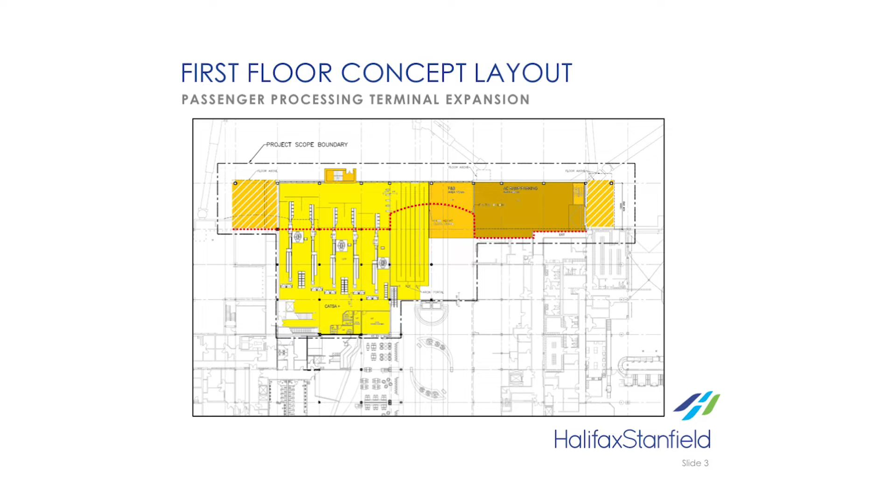So here's the concept we started off with, before we ever started the project. This yellow and gold area is the ground floor of the terminal, and the red line is the existing apron terminal interface. This is the first floor, so we want to build out onto the apron.

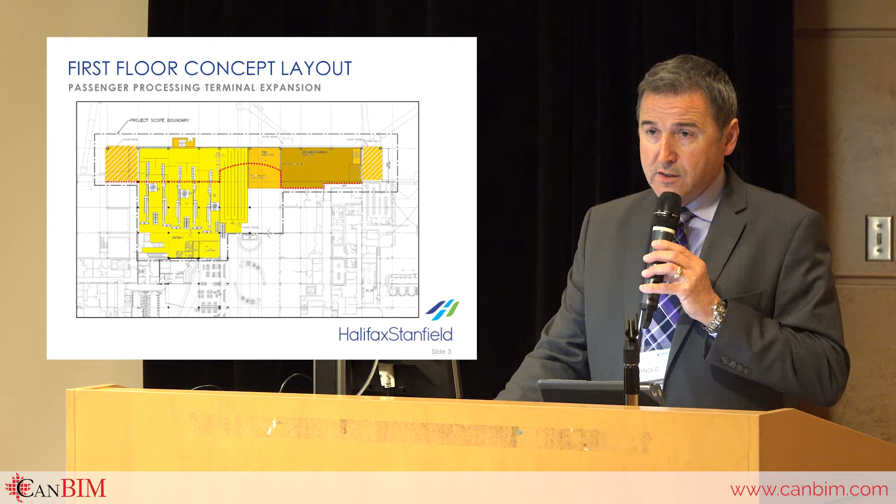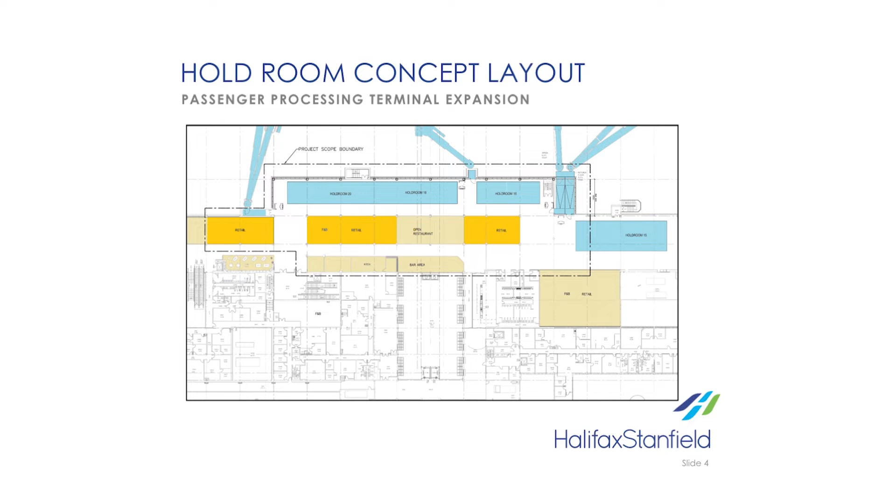On the second floor, we consolidate the concessions so we can move the high-volume, high-frequency passengers to the middle, letting them spend money and increase our non-aeronautical revenue, so we can have the airlines here cheaper and fund the operating budget from the passengers using the facility. It's a win-win for passenger volumes and for the customer experience.

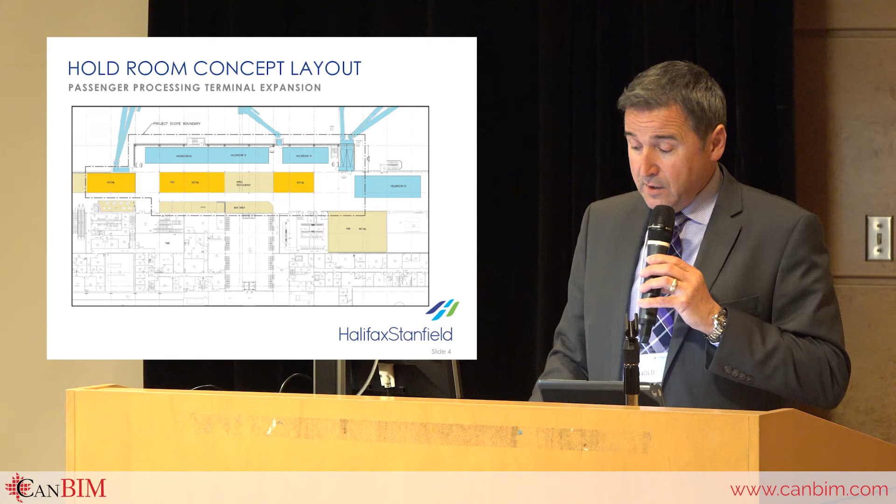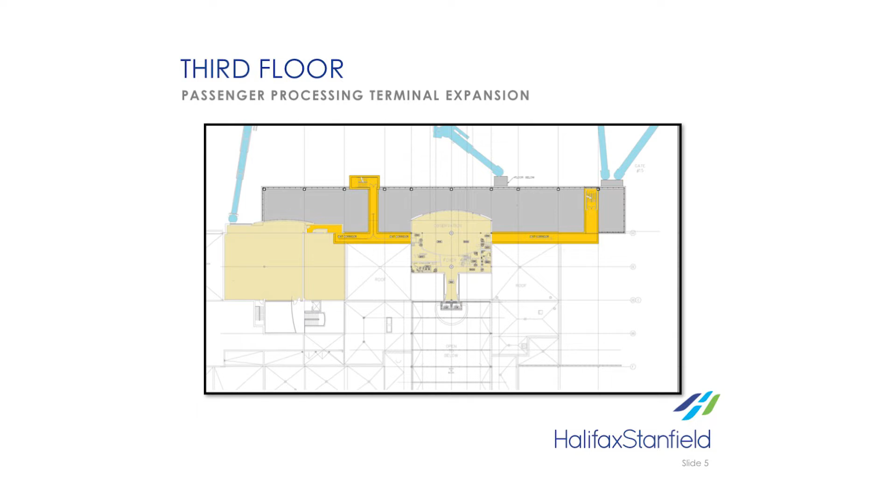Because we had an option to do a 2-story or a 3-story through the modeling process that WSP did for us during the project, and the budgeting that they did before we ever tendered, we were getting close to, well, what can we build here? So we found out that we wanted to do the 3rd floor, and we found the money to do it.

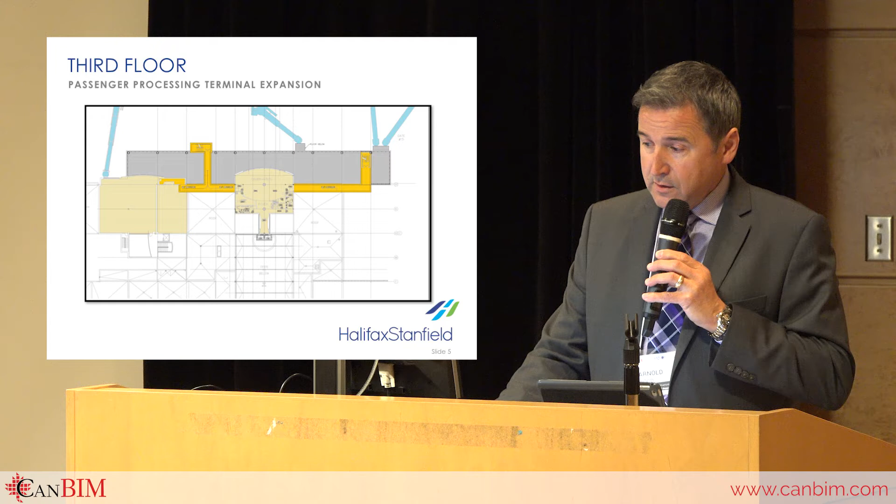So we're starting the builds. We've got aprons closed, gates closed during phasing, and we're on schedule and we're on budget. And that's vastly because of the advanced Revit modeling that we did in advance, and then follow that construction process.

We're still finding small issues, and I'll get to that in a second on lessons learned. But the schedule, you're never on schedule at the airport.

Because of operations, we had to be on schedule because we need all our gates in the summertime, and we took 2 gates out at a time before Christmas, got our gates back operational at Christmas. Then we took 2 until Sunflight season. Sunflight season just finished, and so we got our gates again 2 weeks ago, and we have to have the steel up for July 2nd weekend.

We lost 3 days, but we had a week of float, and we've got a plan to get it back. So having all that done in advance really helped.

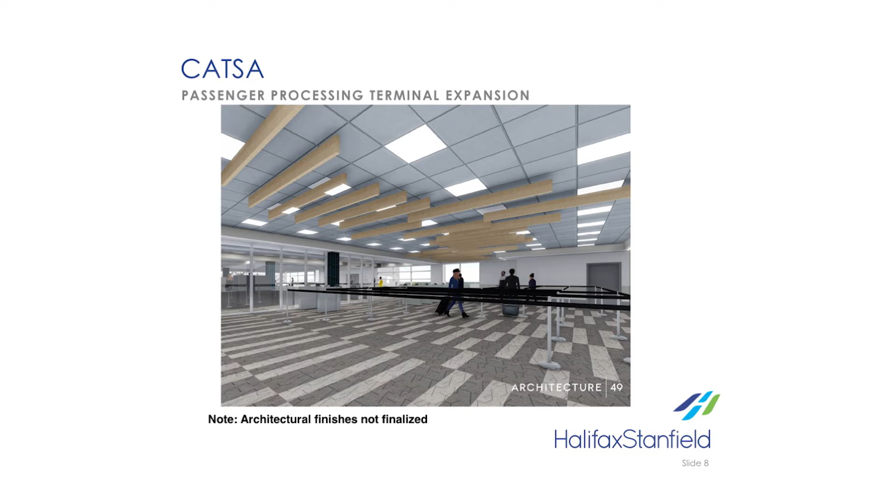So I'll go through some more of, I don't have a lot of detailed Revit drawings here, I've just got some of the 3D drawings showing the views afterwards. This is our PreBoard Screening expanded. This is our new 40% deeper check-in hall for the longer CATSA Plus screening lanes. If you guys experienced in Toronto, Montreal's got theirs, Calgary, and Vancouver. So this is designed for that same equipment.

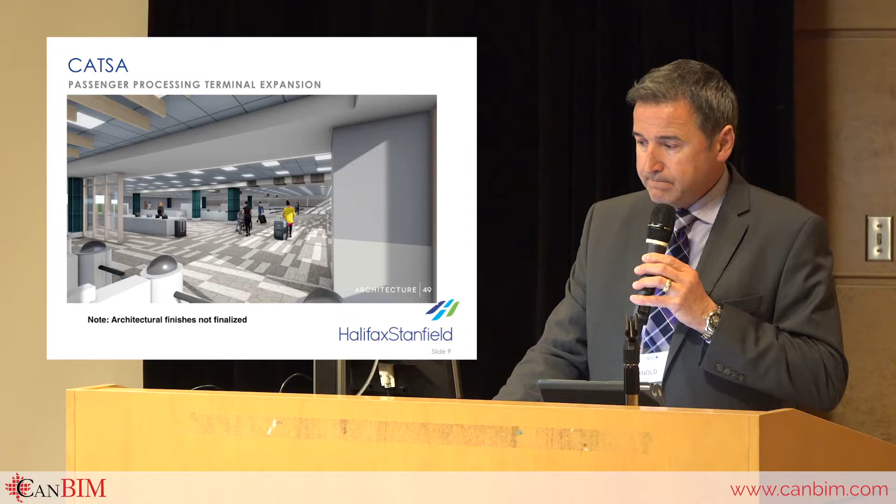This is the 2-story hold room. This is that commercial infill, this bump out that we've done. So this area right now is on the apron. If you're sitting in this area, it's not built yet. And that wall you see on the right, that is the existing edge of the building.

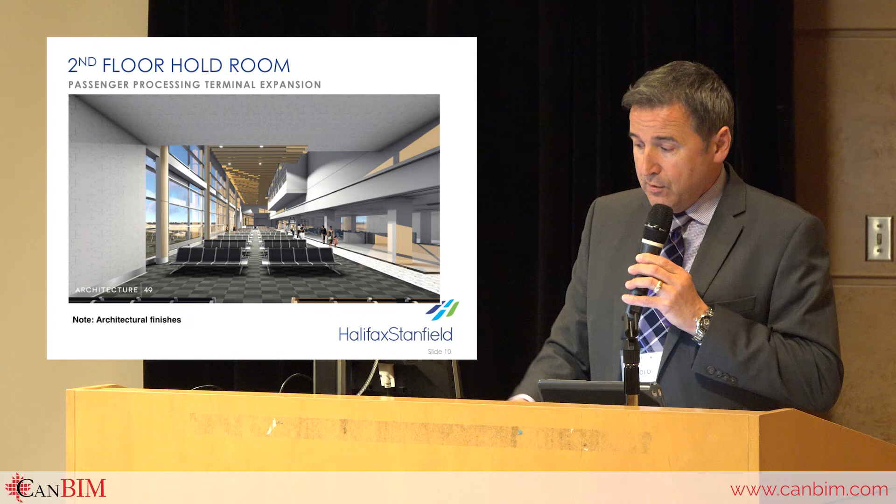In advance, all the materials are chosen. We have a 3D model for management approval. That can be done without Revit, there's other programs, but all that layered on truly has a benefit for management approval and also the other benefits that I've already mentioned. This is top of PreBoard Screening.

If you guys fly out of Toronto, any visitors here or anyone that comes and goes for business, you know at the top of PreBoard Screening there's the credit card lady, and then there's the FIDs, and everybody stops, and the traffic is, it's a standstill as soon as people get stopped. So there'll be a bay in front of that opened, and then the expansion is 1 bay past. So you'll freely flow into the hold room.

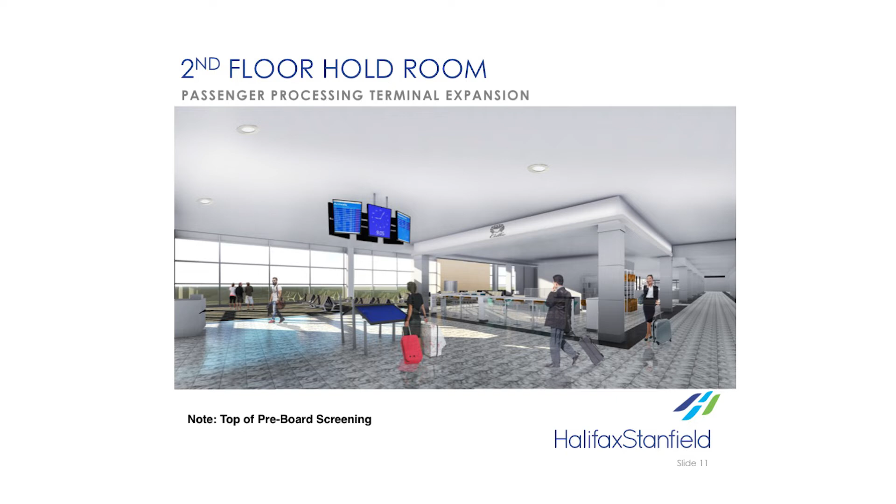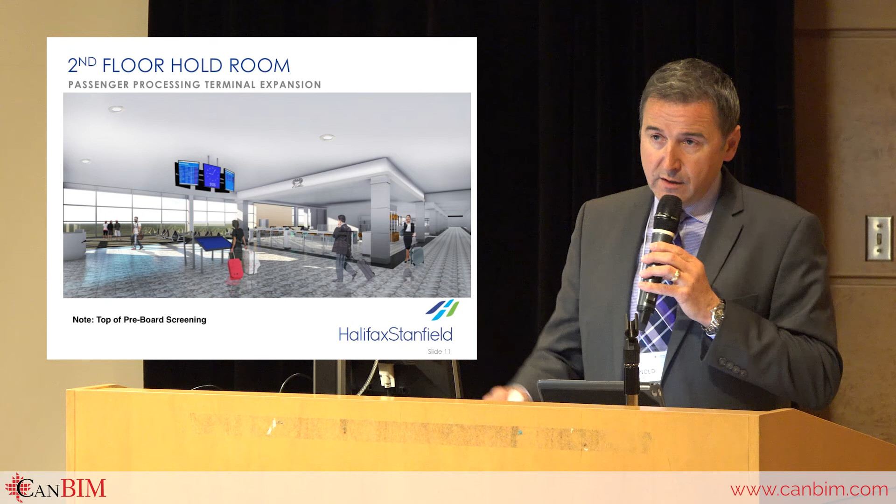We've got a central information hub here where people can stop, exit the traffic flow, look at where they want to go. The screen on the bottom shows some of the other facilities that they can visit for restaurants and shops, instead of the tenants wanting to put signs everywhere so that people can find them with pop-up signs. So moving to a technology-based system so that people can find those other services.

And we haven't even started any of the expansion yet, and 60% of our commercial locations are already booked.

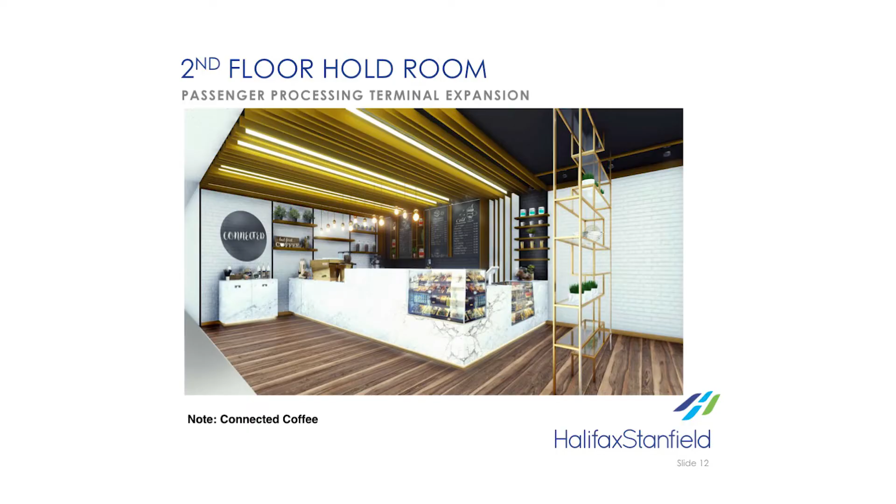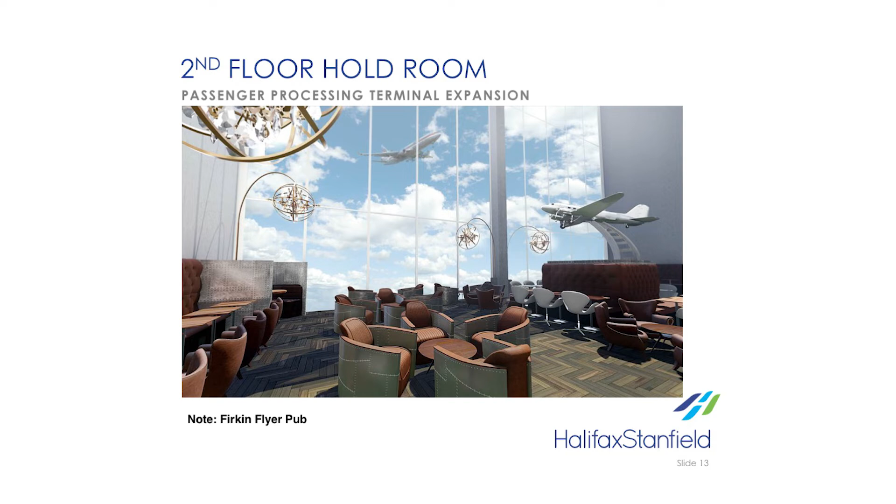So we have the Firkin Group out of Toronto, which has a connected coffee install. They've got the Firkin Flyer Pub that's going to start construction before we have the expansion done. This will be open before we have the new footprint, so we're straightening out corridors.

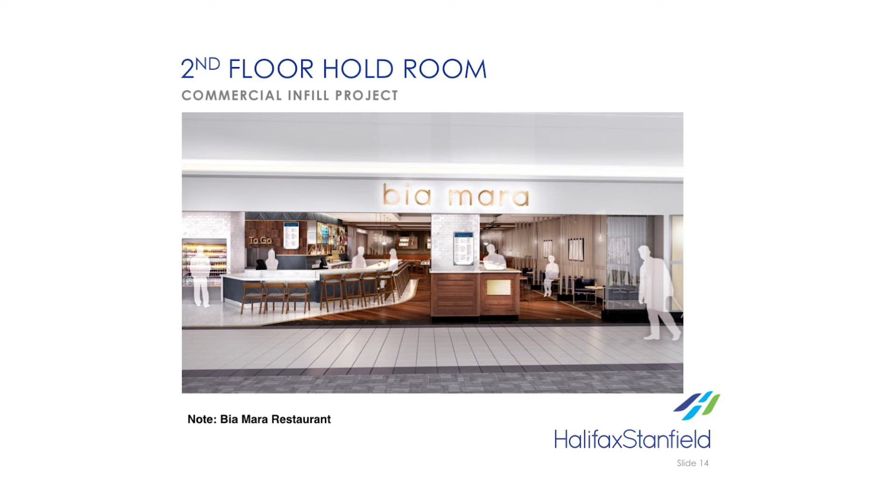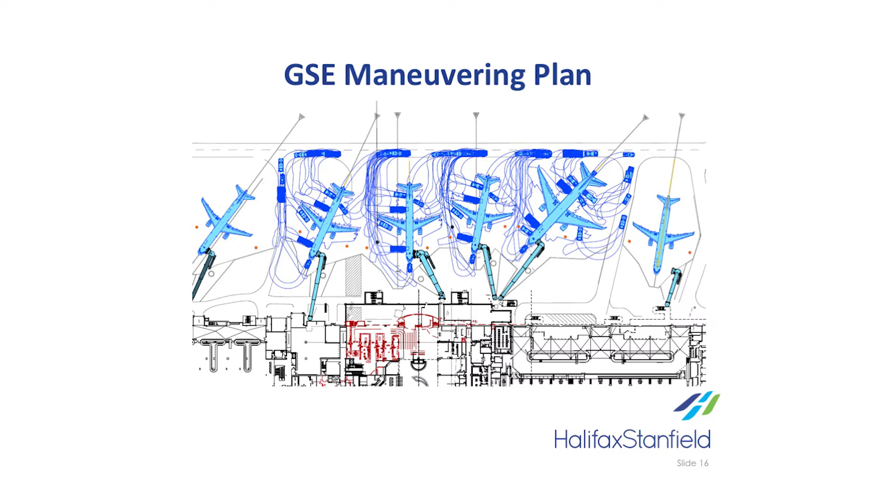So what's next for us? This is the last slide, but I want to talk about some of the things that we've learned through our process. When we first started our level of development, we didn't even know what that was.

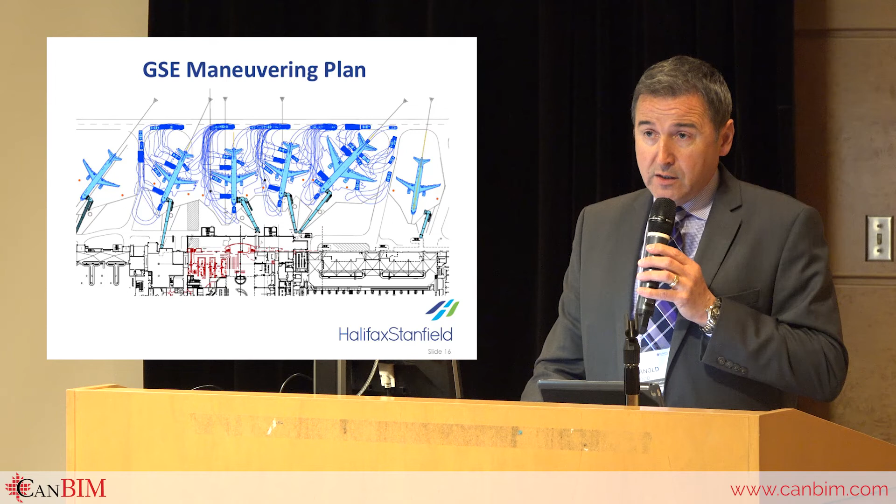So for us, we put in our contract documents conflict resolution. Many times during a 2D design, you get the mechanical or the electrical guy to do the conflict drawings, and that'll help with a lot of the issues.

So we wanted it designed in enough detail so that the designers would have everything drawn so that we didn't rely on the trades, because death by a thousand knives is usually what we have during a project build, because the first trade that got there decided the datum point for everyone else.

And I think they all had 8-foot ladders. So if you look above our ceilings, there's 2 feet of infrastructure and then 4 feet of nothing. So when somebody loses an inch, our ceilings have to drop. And there's no contractual way to hold anybody to it.

But by having the 3D model done to that level of development, we maximize all our ceiling space, put everything up high, and our goal was and still is to tell the contractors where to put things, check to see that it's there so that the next guy has his space that was already identified to him.

So our level of development has increased since we first started. Instead of just saying conflict resolution, we went to 250. We didn't get what we thought we needed. We still had some change orders. We went to 350. And the PPT, or Passenger Processing Terminal Expansion, has a 350 design requirement and a 400 as-built.